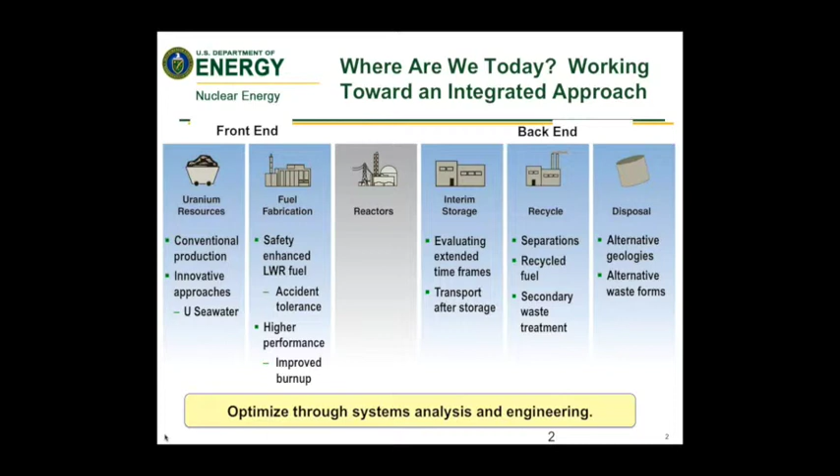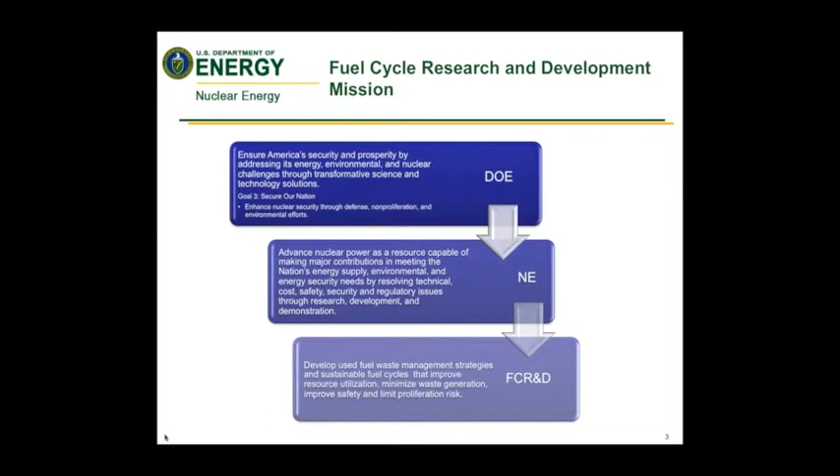This slide shows you the overall mission of DOE down to the Office of Nuclear Energy specifically, and you've heard most of this multiple times, so I won't go into detail. But then ultimately getting to the fuel cycle research and development mission, which is to develop used fuel waste management strategies and sustainable fuel cycles that improve resource utilization, minimize waste generation, improve safety, and limit proliferation risk. That's the overall goal of the fuel cycle program. And under this work scope, proposals that would meet and address that mission are sought.

Now we have the objectives of fuel cycle R&D, near term, medium term, and long term. You'll notice this is a long-term program with the ultimate goal of demonstrating advanced technologies, whether it be an open fuel cycle or a closed fuel cycle or some alternative, operating dry storage demonstration, and conducting engineering analysis of disposal sites are the longest-term activities.

Moving more near-term, some of the priorities here in the near term are addressing the Blue Ribbon Commission recommendations on used fuel disposition. There's also an increased focus on accident-tolerant fuels, advanced fuels for current light water reactors and planned light water reactors.

And they also have a major activity, the fuel cycle systems option study, where they're looking at the entire universe of fuel cycle options and the combinations and doing a detailed evaluation and screening and down selection to determine which options are most promising and warrant further R&D. In addition to the down selecting to narrow the field, they're also trying to identify specific areas of research that might benefit multiple options, and that'll help steer future planning.

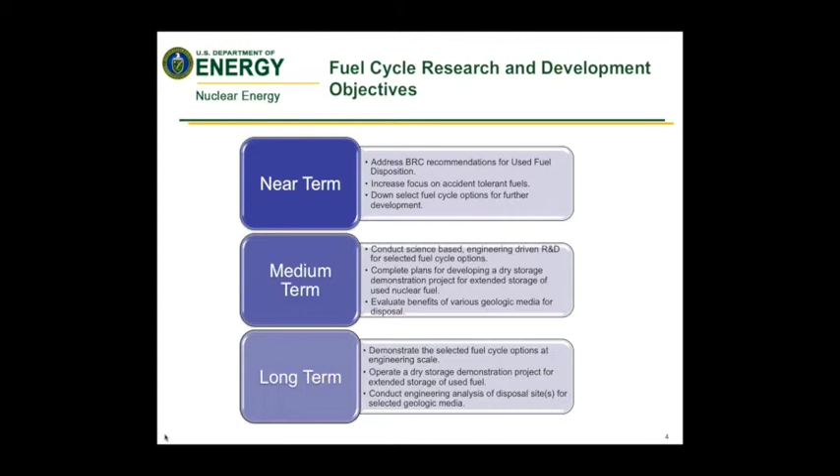Here's another slide showing the balance between near-term and long-term objectives. And you can't work on everything, but you need to make sure that we're still doing enough to continue carrying all things forward for the foreseeable future.

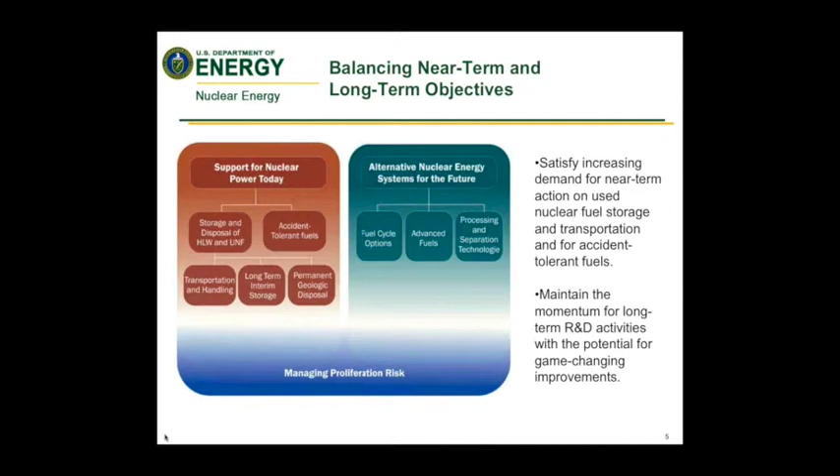Here is the work scope for the mission supporting Fuel Cycle 1. Again, this is the general area where you can submit ideas related to the fuel cycle that may not fit within one of the other program supporting work scopes that support fuel cycle. And you'll see a couple activities highlighted with an underline as priority items of interest to the program currently.

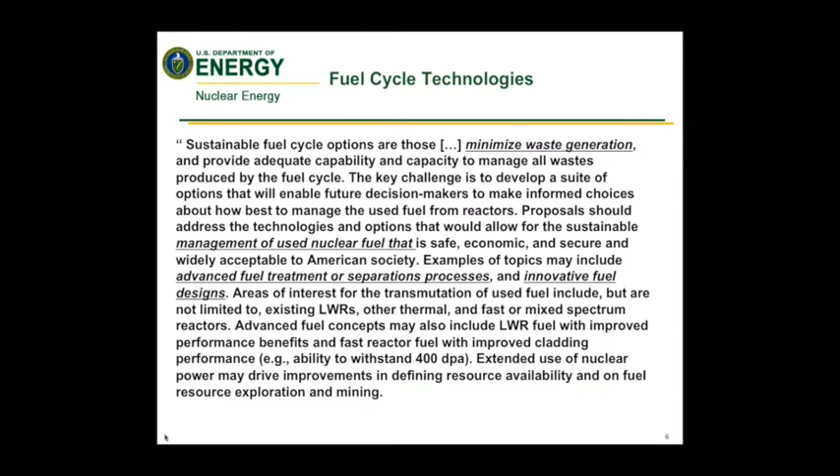The next several slides are just a slide for each of the fuel cycle campaigns. These are the technical program areas within the program. You've seen detailed presentations on all of these either earlier today or you will tomorrow. So I'm not going to spend too much time, but this gives you an idea of the types of things that are of interest.

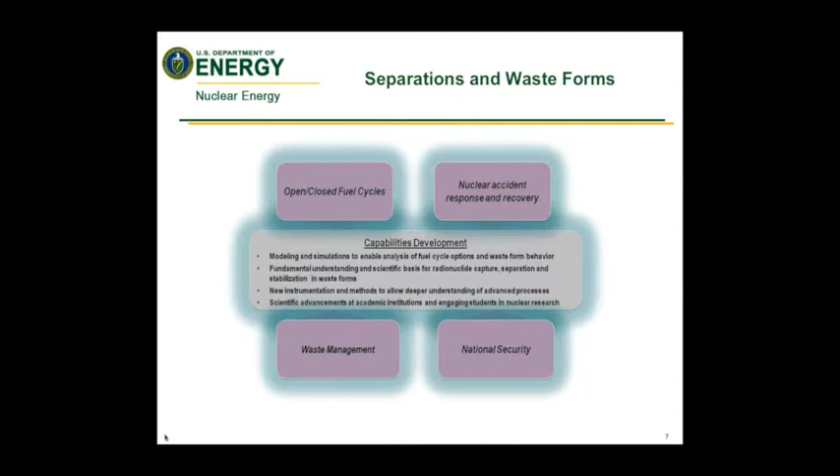Separations and waste forms looks at advanced reprocessing and recycling and material recovery activities, as well as developing the associated waste forms from those processes. Advanced fuels, like I previously said, focuses both on near-term accident-tolerant fuels for light water reactors and metallic transmutation fuels for advanced reactors under a closed fuel cycle scenario.

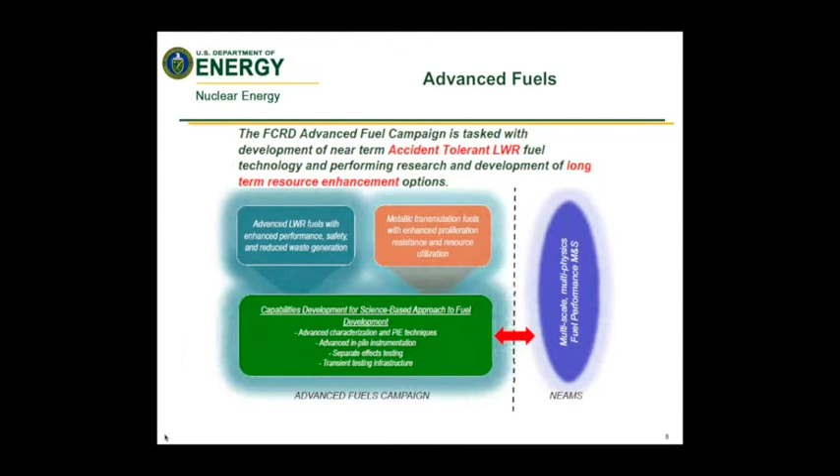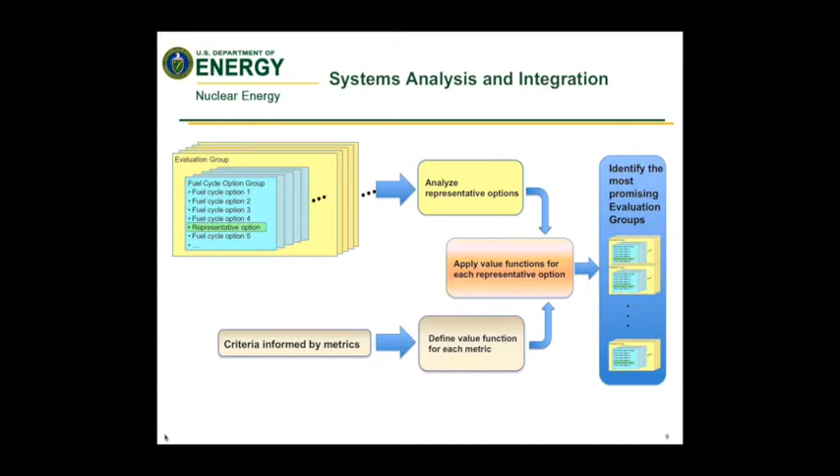Systems analysis and integration looks at the complete picture, evaluates the different fuel cycle options, and identifies gaps where additional R&D is necessary. Materials protection accounting and control technology. This is the area that looks at the non-proliferation concerns associated with various options and works to develop technologies and analysis tools to minimize those risks.

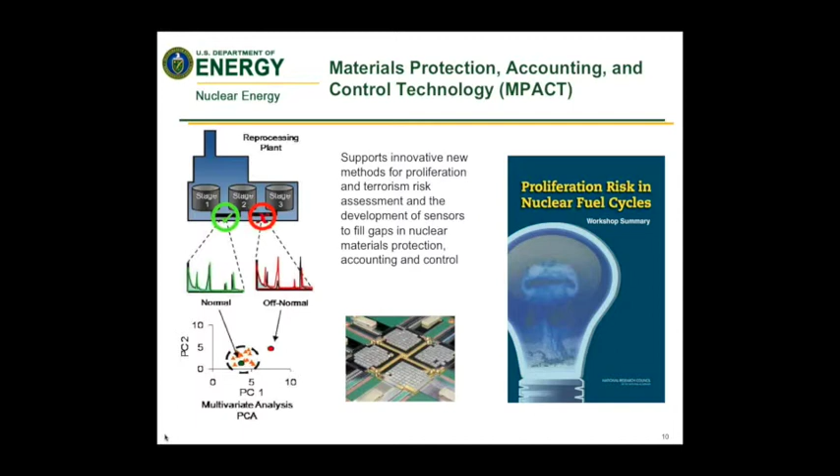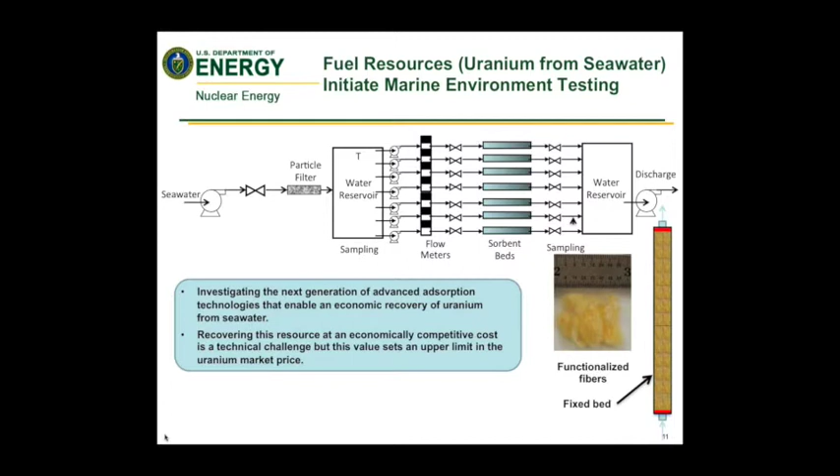Fuel resources, this is now looking at the front end of the fuel cycle. The focus currently has been extracting uranium from seawater, and you heard more about this today. This is the second mission supporting area under fuel cycle. Used fuel storage and transportation. This is to support activities including the BRC recommendations looking at extended storage and associated transportation of used fuel. And you'll hear more about this tomorrow.

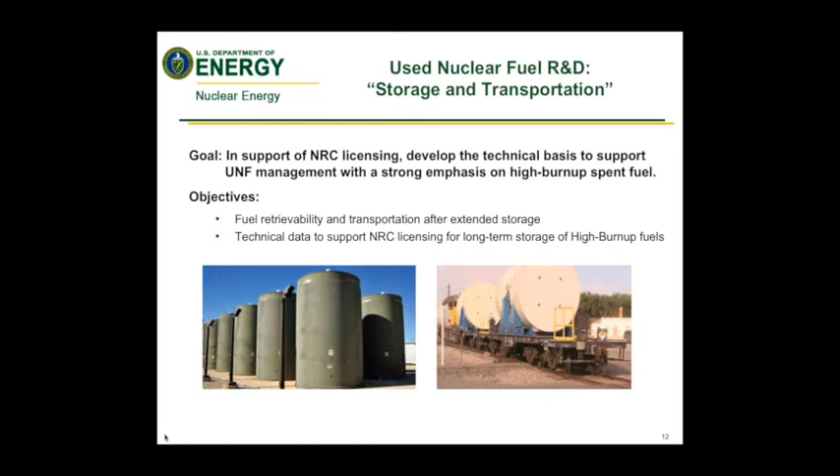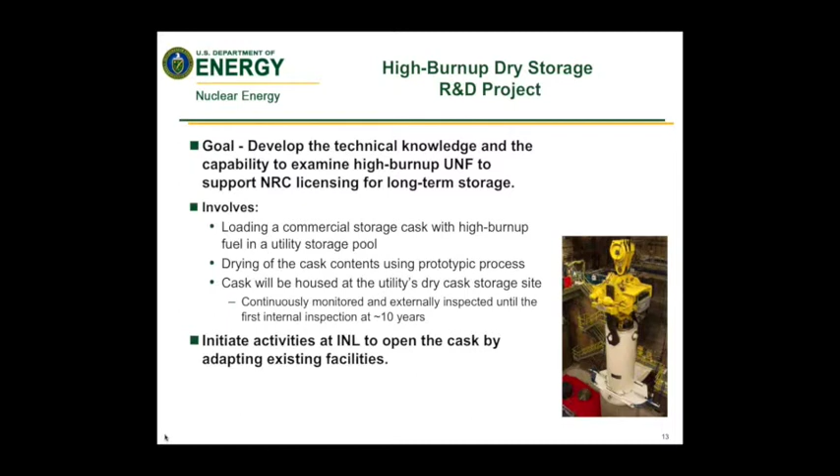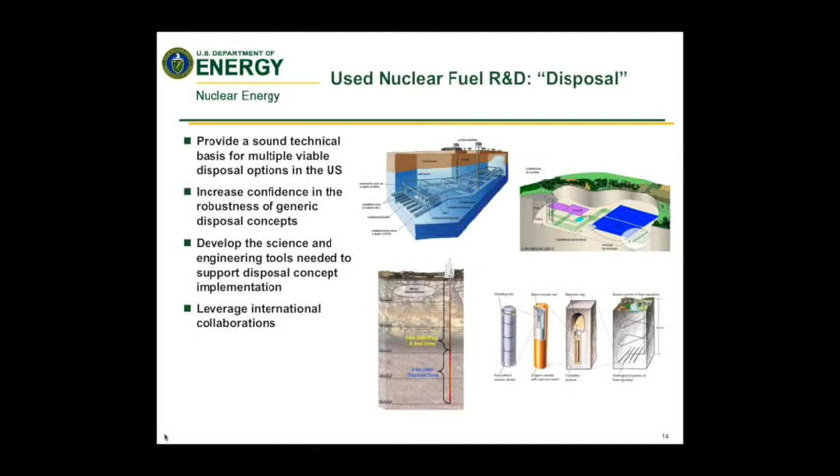High burnup dry fuel storage. This R&D project is very focused on extended storage demonstration of used fuel and the necessary technology and research associated with it. There's also a program looking at disposal, focusing on the geologic options, different geologies, different ways for final disposal of used fuel. And with that, I will take questions.

Is fuel reprocessing something that is included in this work scope? Yes, it would be. There is a separate work scope, FC1, which covers specific areas of interest to separations or reprocessing. But if you have something related to reprocessing that doesn't fit within that specific work scope, it definitely would fit here.

Would research on degradation of fuel storage canisters be included in this work scope? It would. Again, depending on the specific area of interest, it may be more appropriate for the degradation to be incorporated under the used fuel work scopes. There's a program supporting used fuel disposition work scope that covers storage, transportation, and disposal. It may be appropriate there.

There's also 2 IRPs associated with used fuel storage. So depending on what the specific area of interest is, it may fall in one of those program supporting or IRP work scopes, but if it's something innovative that's outside of the specific interests identified in those other areas, it definitely would fit here as well.